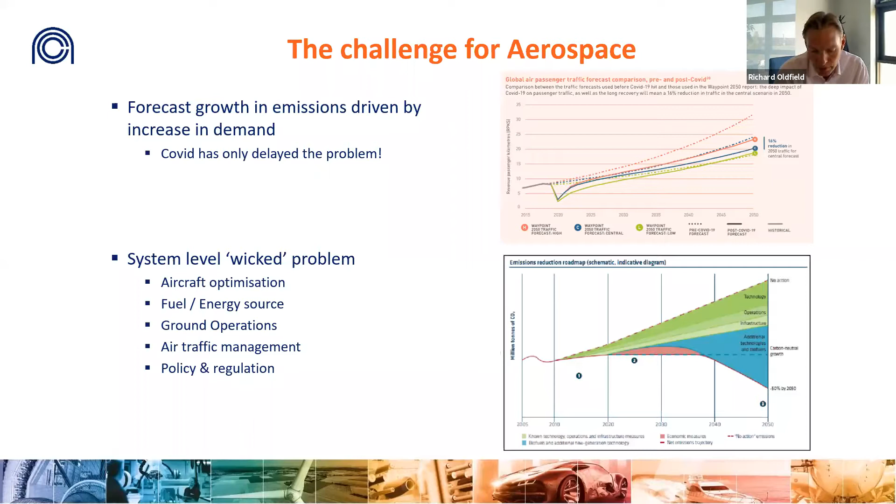The UK is already taking a leading role in this transformation. It's established the Jet Zero Council, supported by the Prime Minister and chaired by Emma Gilthorpe, Chief Operating Officer of Heathrow, which includes key industry and government representatives.

They're developing a net zero roadmap for aviation. You can see a draft copy of that on the right-hand side of this chart, and that will be published in the coming weeks and months with various initiatives underpinning it, supporting millions of pounds of research through UKRI, Innovate UK, and the Aerospace Technology Institute, to name but a few.

One of these programs launched recently is called FlyZero, a specific study looking at the aircraft of the future. But we're not the only country committed to this - you may have seen recent announcements in France and America indicating a growing commitment for change. The aim of today's showcase is to explore the work the University of Bristol is doing to support this effort. I'm delighted to hand over now to Professor Jonathan Cooper to lead the presentations.

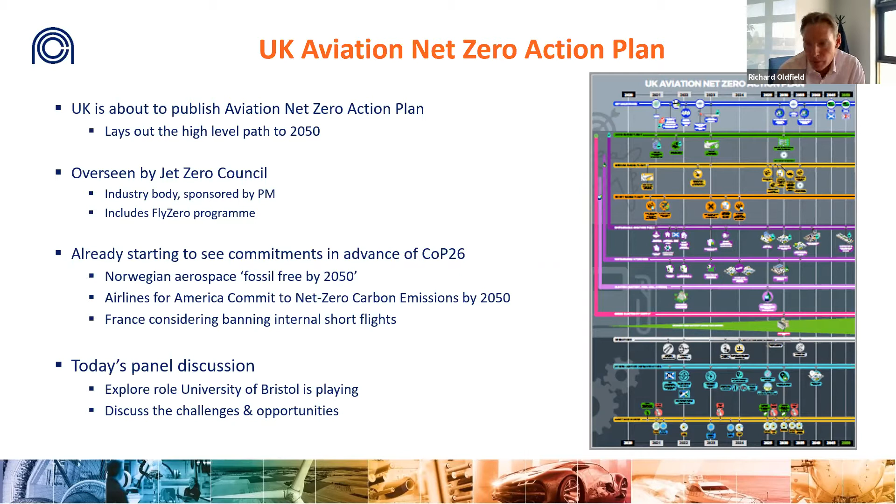Good afternoon, everybody. I've got a couple of slides to show you. The first one here is a bit wordy, but the key takeaway is there are many technical challenges that need to be faced for us to enable greener aviation and eventually zero emissions. And there is no silver bullet - there is no one single technology that's going to transform things overnight.

We can't simply just replace kerosene, and it's going to be almost impossible to retrofit current aircraft. So the likelihood is we're going to have a range of different solutions where we're going to be gaining 2%, 1%, 3% from different options, all of those together. One of the key things from that is we are going to have to produce much faster design and particularly certification requirements and capabilities.

I've put together a whole series of different technologies, some of which are just what can we do with current technology, so better engine efficiency. There's been some great developments there, but if we're not careful, we may do well with carbon but generate more NOx and contrails. Biofuels are mooted as quite a quick solution, but then you've got problems with the generation - are you actually taking away food resources to be able to generate fuels?

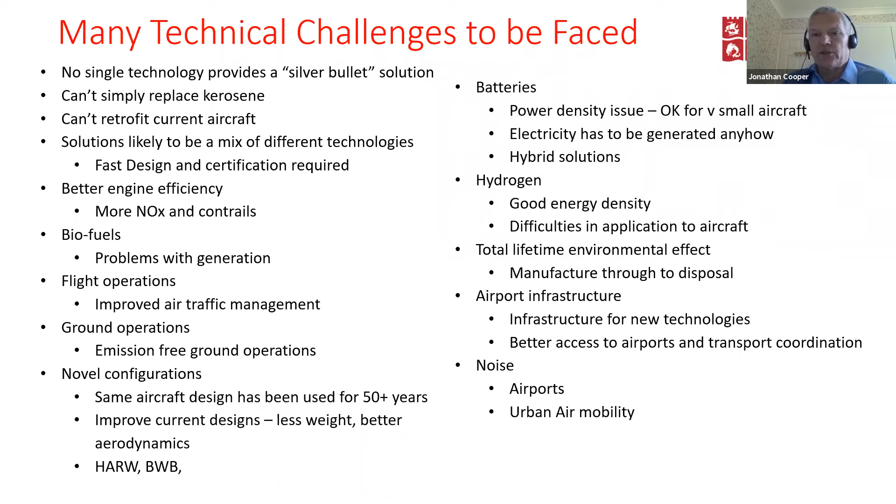We're trying to work together to find ways of producing more complete solutions. Data science is probably going to be the key thing that ties everything together, particularly when you're getting to really big, complicated design issues. And then things like talking to our colleagues in the Faculty of Science in atmospheric chemistry, for instance. There's a lot of other things going on in the university that we need to exploit.

As a final thing, it's not just aviation this applies to. You don't just want greener aviation, you want greener transport, greener infrastructure. So a lot of these technologies will map across, and there's good work going on and a lot more to do in the future at Bristol.

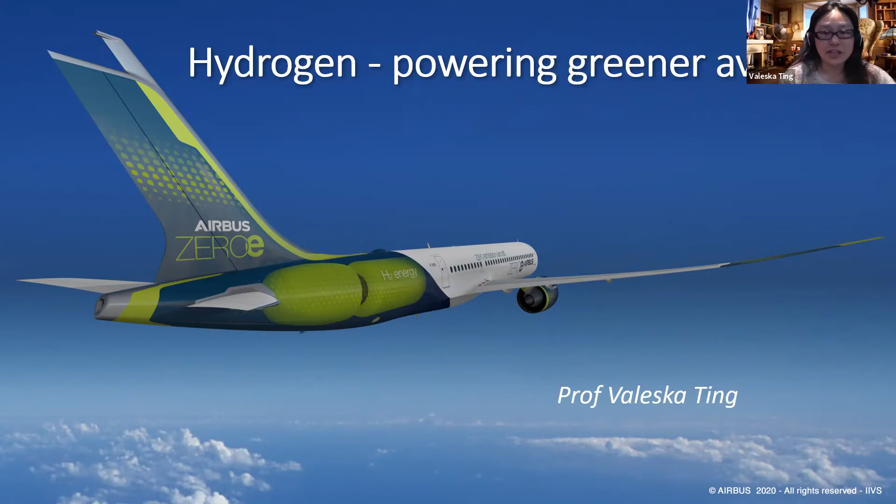I guess the first question is, why are we interested in hydrogen? And why do we, well, I personally think that hydrogen has a great future in terms of helping to get to net zero with aviation. And one of the benefits of hydrogen is it has a really high gravimetric energy density.

In fact, it is the highest gravimetric energy density fuel that we have. So that means, for example, kerosene has a fuel density in the region of about 40 megajoules per kilogram. Batteries are about 1/40th of that, so less than 1 megajoule per kilogram. And hydrogen has about 3 times that energy density per kilogram.

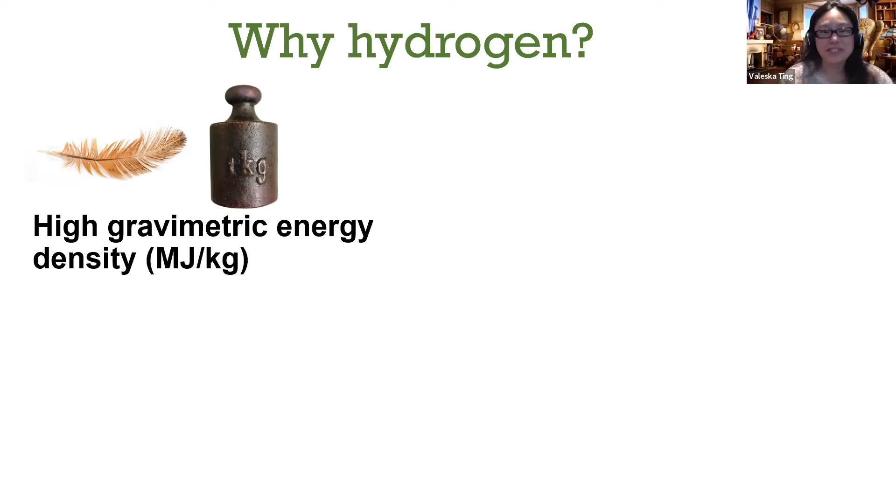So it's a very light fuel, and it packs a lot of punch for the number of kilograms that you have to have on board a vehicle. So that's one big bonus for hydrogen.

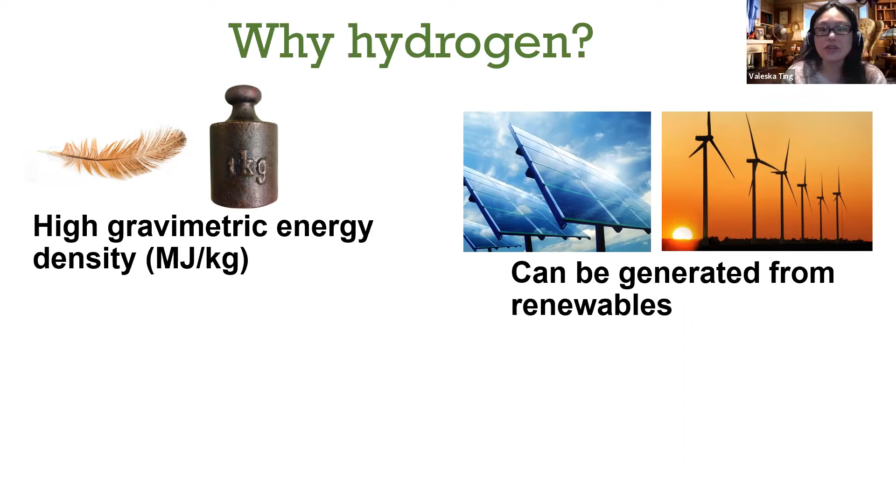The second one is that it can be generated from renewable sources, such as solar and wind power. And that means its production can be made more equitable. People can generate hydrogen using just renewable electricity and pure water, using electrolysis, for example.

And so it has a potential to be a complete green cycle in terms of a sustainable fuel. And then finally, if you use hydrogen in either a combustion engine or with a fuel cell, then the only byproduct is the regeneration of water. So it has this potential to be a zero carbon fuel, and also that you haven't got the problems with NOx or other particulate emissions that you would have with other fuels.

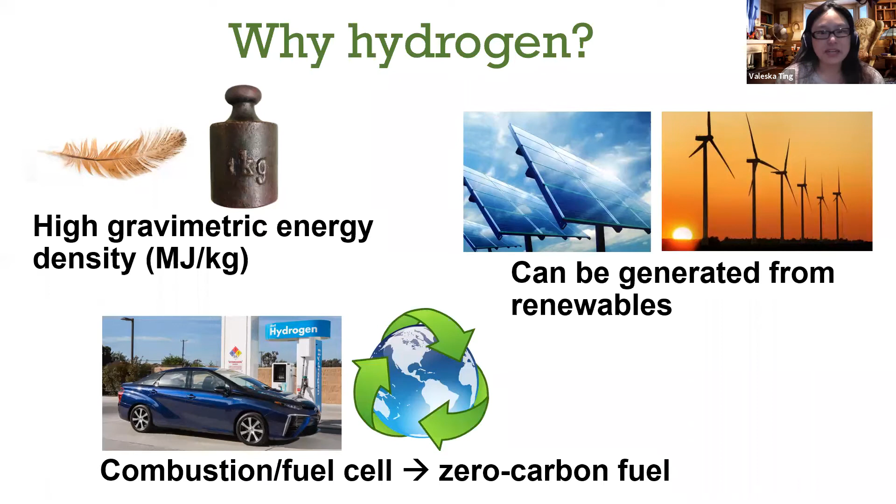So then we come to the question of what are the advantages of hydrogen for aviation? Now, as you remember, it's a very high gravimetric density fuel, so it's very lightweight. And this is important when you think of how much of a plane's weight comes from the amount of fuel that needs to be carried, especially on transatlantic flights, for example. So in terms of aviation, the saving in terms of weight is very important.

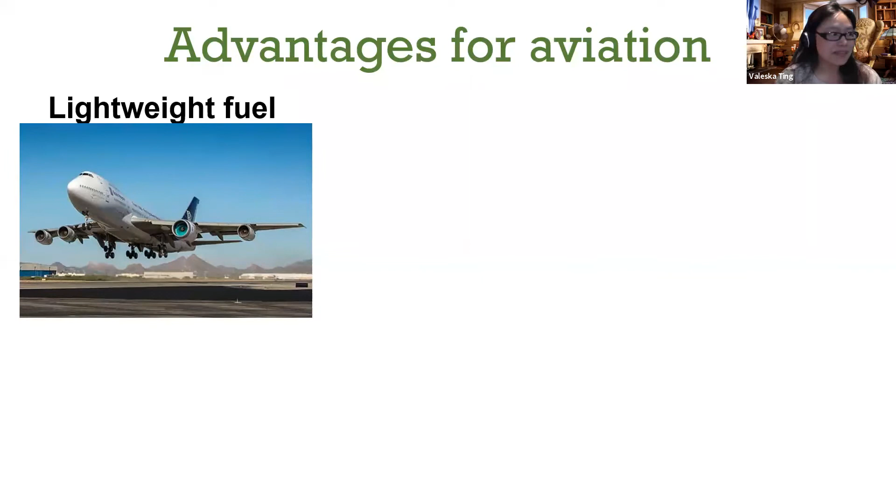A second aspect is that, as Jonathan and Richard alluded to, there are a plethora of different technologies available, battery electric or electric powered aircraft being one of them, but electric aircraft aren't suitable for long haul flights. So if you wanted to fly from the UK to Australia, for example, batteries don't have the energy density. The weight of the batteries alone would be prohibitive. And so for long haul flights, hydrogen is one of the most promising alternative fuel sources.

The third advantage is that, as was described in the introduction, we're going to need a really drastic transformation of aviation if we're going to meet these zero emissions targets. It's not just a matter of making our existing aircraft more efficient. We need to look at ways where we can cut out the carbon, the particulates, and the other emissions from aircraft.

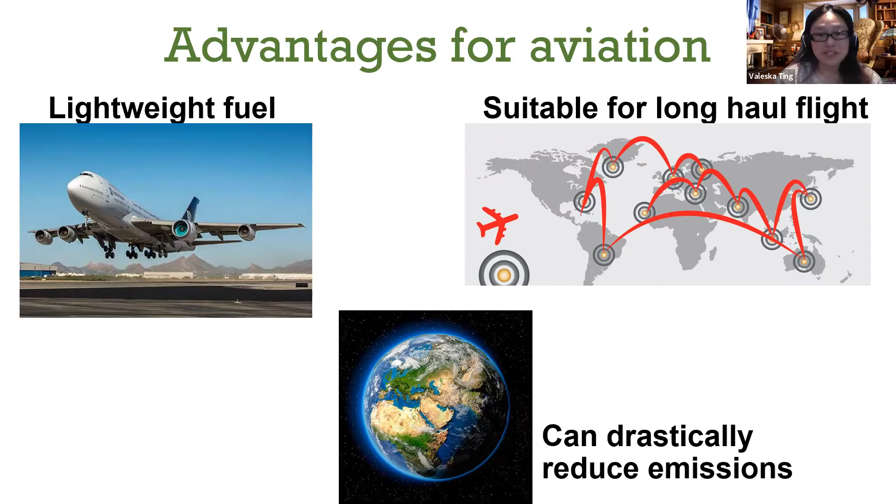And so, using drop-in fuel solutions like biofuels, for example, is just displacing the emissions and causing emissions at higher altitudes. We really need to go to something like a hydrogen plus fuel cell combination, so that we can eliminate the emissions from our aviation. This is one of the ways that we can drastically reduce emissions to try and get to those net zero targets. So what are we doing in Bristol to address these issues?

Well, in Bristol, we have some expertise in hydrogen storage. This is my area of interest, and it's looking at not only conventional storage of hydrogen in either high pressure tanks or as liquid hydrogen, but also looking at novel material solutions using things like nanoporous materials, which are also termed molecular sponges. These are materials that can suck in and store hydrogen at really high densities. So looking at inventive ways to be able to store the hydrogen more efficiently and safely on board an aircraft is one area that we can help.

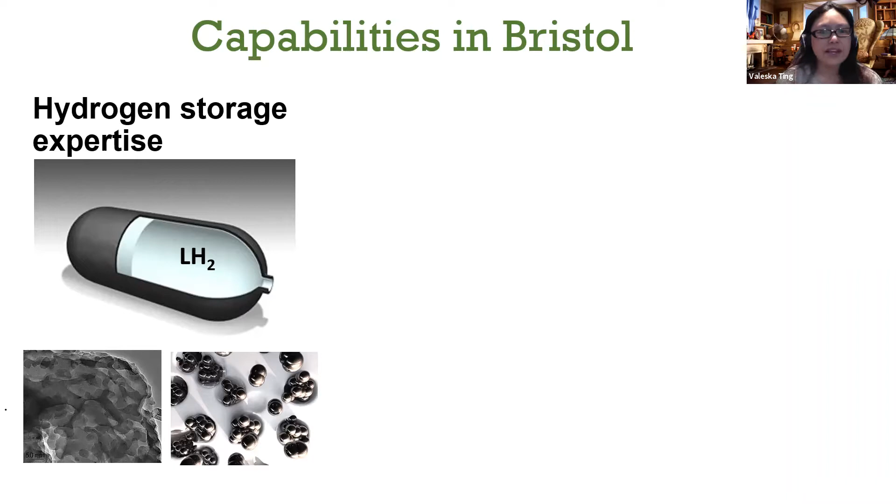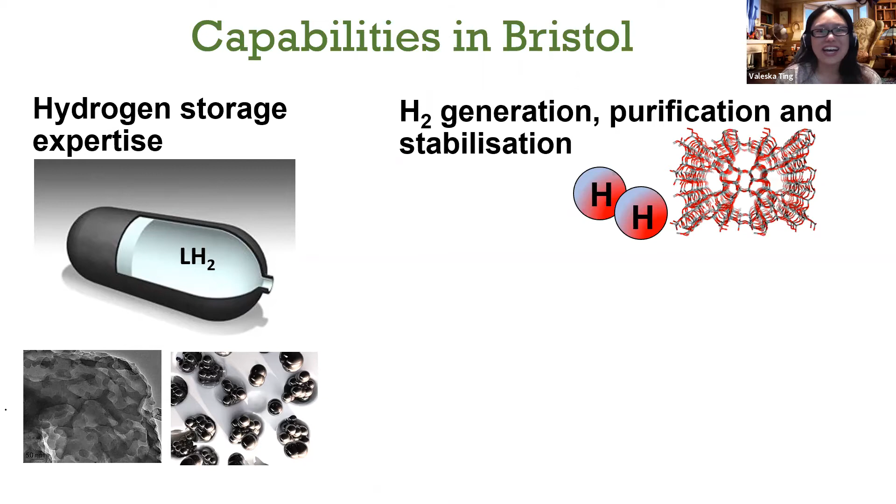Secondly, we also use some of these novel materials to help with the generation, the purification, and the stabilization of hydrogen. This is really important if you're considering storing, say, liquid hydrogen over a 48-hour cycle or over a long haul flight. You want to prevent boil off, and some of these materials are very good at helping to retard the loss of hydrogen through boil off. In addition, if you use fuel cells, then you need a very pure hydrogen source, and so we're looking at some good solutions for that.

And I'd be remiss if I didn't mention that Bristol has a world-leading Composites Institute, and we're also closely linked to the National Composites Centre. This is going to be essential if we're going to have to redesign the body of the aircraft to accommodate these different fuel solutions. So composite design and manufacture to make lightweight designs of aircraft, and additional flexibility when working with structural composites, being able to integrate the new fuel, the new power delivery within these aircraft. There are lots of opportunities in being able to embed functionality and new designs into the new generation of aircraft.

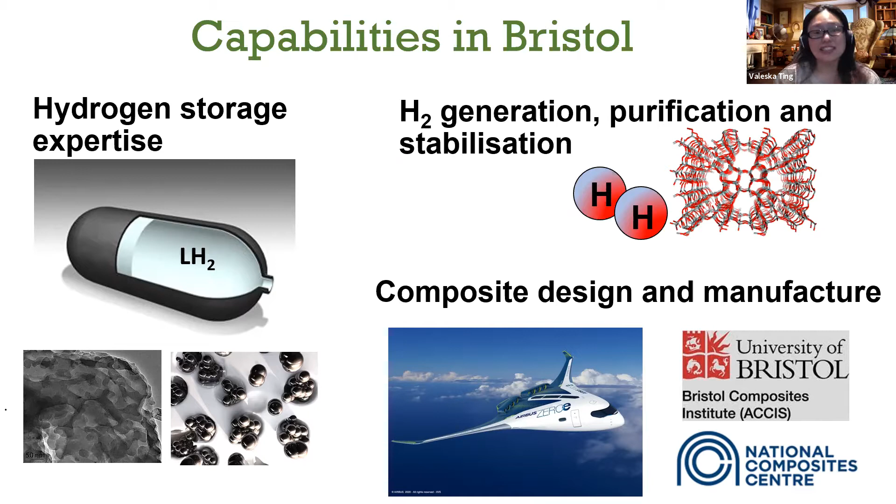have industry links. And we've also got colleagues in chemistry and physics who look at different aspects of hydrogen generation, hydrogen cogeneration, and all of this expertise and the broad base of knowledge means that we can make some really good contributions to making hydrogen a possibility for sustainable aviation. That's all I wanted to say for my brief overview.

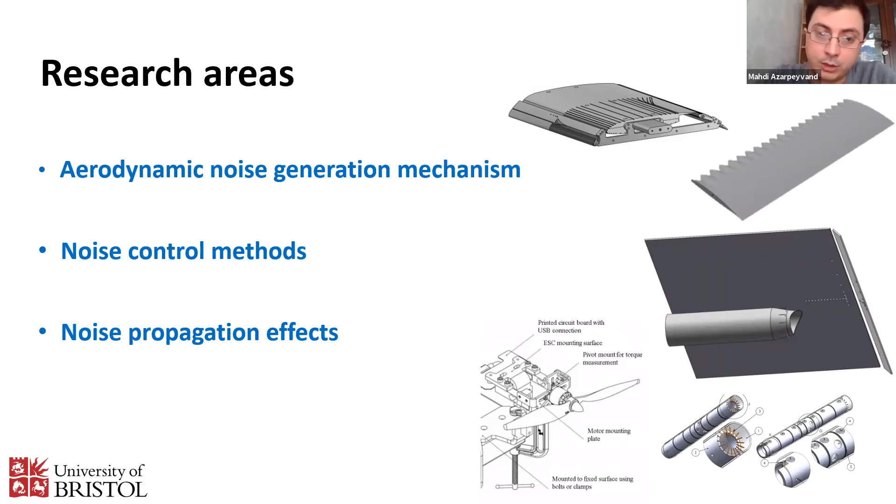Once we understand the noise generation mechanisms, we try to propagate the noise and understand the noise propagation over complex terrain, which is quite an important topic, especially in the area of urban air mobility or helicopter noise. Next slide, please.

So Bristol is home to some major infrastructures at the moment, quite unique in the UK and Europe. We have the UOB aeroacoustic wind tunnel. You can see it on the left side, which is now a national wind tunnel facility. This wind tunnel enables us to experimentally measure the noise from different aero components, whether it's a wing or propeller or the landing gear system, etc.

The wind tunnel is equipped with lots of microphones and a beamforming array and flow measurement devices like PIV, LDA, hot wire, which enables us to properly understand the noise generation mechanism. So this is a national wind tunnel facility, which shows its importance for the UK.

In the middle, you see our UOB high-speed jet facility. This is a jet noise facility for understanding noise from high-speed jets. This is, again, a major infrastructure, quite unique in the UK and involved in several industrial and EPSRC projects. We also have some other facilities, some of them quite new.

You can see there on your right the pressure neutral acoustic wind tunnel. This is designed for propeller research, again, realizing the shift in the research from jet to propeller. We have designed and built this new wind tunnel, which enables us to do proper research on propeller aerodynamics and noise.

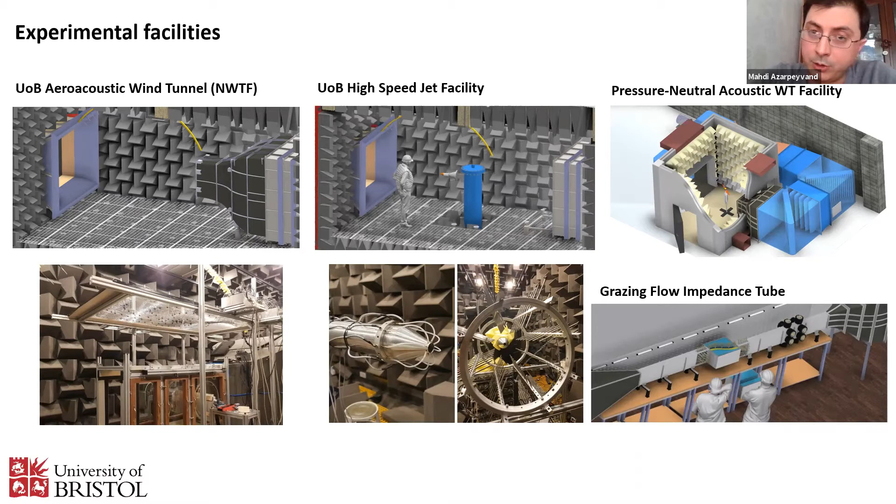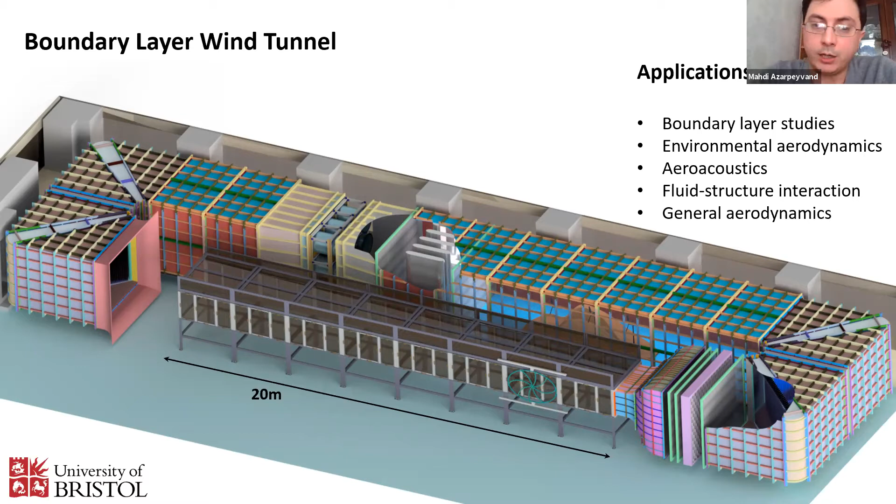Back to you, Jonathan. Thank you very much, Mahdi. I suppose the attention now goes to me.

So I'm going to give a short overview of some of the work on using aeroelasticity to help design more fuel efficient and environmentally friendly aircraft. We don't have an aeroelasticity research group, but this is spread across three research groups, so composites, fluids, and also dynamics and control, and involves, as I say, about 10 academic staff and about 15 researchers, mostly funded by the ATI, the EU, and also some from the EPSRC.

If the wings bend and twist, that affects the aerodynamics, but that then affects the loads on the wing, which then bend and twist again. So we have this continuing interaction. Initially, it was found that you have to design an aircraft carefully because you can have catastrophic structural failure, something called flutter. There's lots of fairly scary videos to see on the internet. But it also has a big effect on things like the response to gusts, the response of the aircraft on landing, and these resulting loads influence the aircraft design.

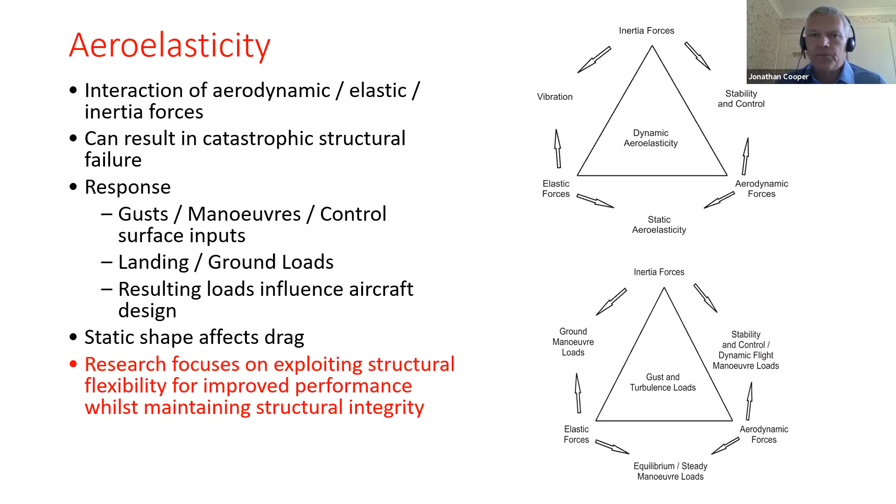So we move to the next slide. I was going to put an equation in, but I thought, no, I can't possibly do that. So this is what all first year students know as the Breguet range equation. And essentially it says that if you want to fly further, you have to have better aerodynamics, so less drag, more lift. And also if you have engines which burn less fuel, that also increases your range. And also if you have less weight, that increases range.

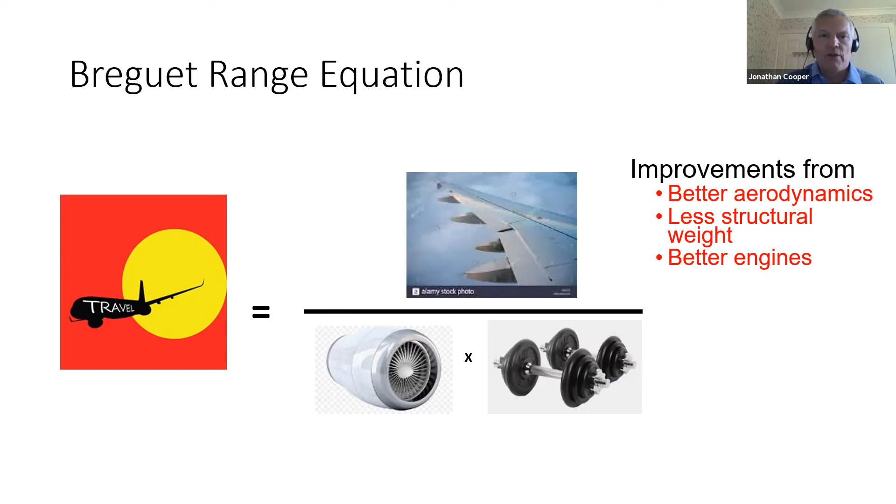And a lot of what I've been trying to do is to combine these three things together, and rather than just saying, let's make the structure as light as possible, or let's improve the aerodynamics as much as possible, can we get a trade-off and use those interactions? So we move to the next slide, which is perhaps a little busy. We've got the equation that we're all going to be tested on at the end of the talk, but how does the research help with that?

Quite a lot of work looking at novel configurations. I'll talk about what are called high aspect ratio wings, so longer wings, but also things like forward swept wings as well, which theoretically give you better performance, but we still don't know quite how they would appear in flight.

Key also things that we're looking at is reducing the weight. So we can do that by using composites, but also if we increase the speed at which things like flutter can occur at, that is good because it means we can reduce the weight. Or if we can reduce the effect of gusts.

So, you know, we fly and the captain says, put your seatbelt on. If we can reduce the effect of those gusts, not only will it be good for you as a passenger and you won't spill your coffee, but it means there's less loads on the plane.

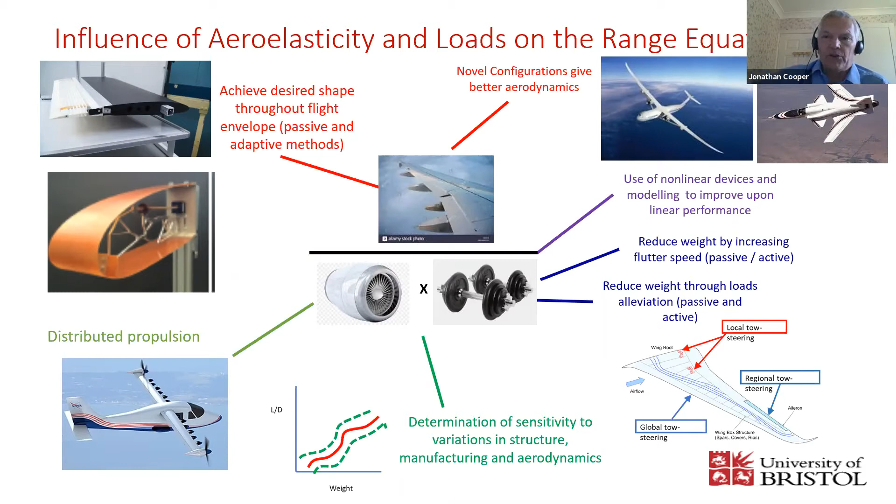And also distributed propulsion. We're not necessarily going to have 2 big engines or 4 big engines on aircraft. We're likely to have lots of very small electric or hydrogen powered propellers, and looking at that can have some quite dramatic effects on the design. So the next slide, please.

And the final 2 slides are talking about high aspect ratios, and you can show that by increasing the span, so making the wings longer, you reduce what's called the induced drag, and that gives you better performance. But there's a lot of things that could be a disadvantage. So you may need extra weight to carry the load. The wings are highly flexible, which could cause problems. The roll, and we want to be able to control the aircraft. So there's certain roll limits that we need to do.

Another key effect is that if your plane is too long, the wings are too long, you'll get charged more by the airports for the airport gate sizes. So that's why 737s and A320s are almost, you know, similar span, and that's because they're just below moving into the next gate category. And the design is much more complicated.

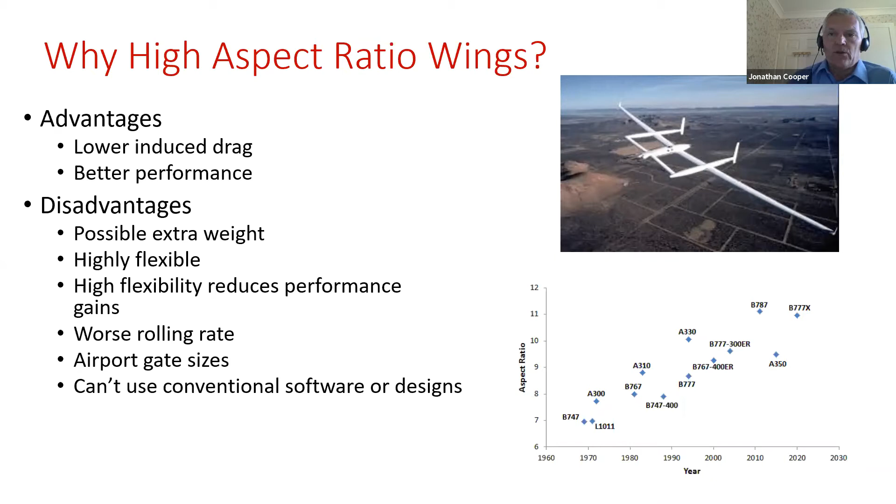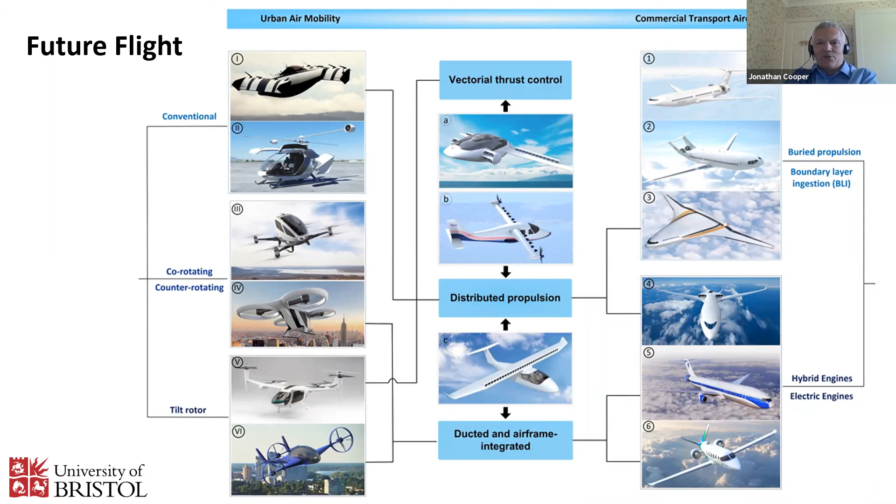So it's great to see that we're not just tweaking the tube and wing. Really interesting times. But how we get to the right solution, if there is one solution, I don't know. But that's why I'm an engineer. I did the maths degree originally, and then decided engineering was more exciting, shall I say? Sorry to any mathematicians who might be listening.

Well, I think on that last question, it really just summarizes both the opportunity, the interest, and the pace of development that's going to happen in this area over the next few years, and it will certainly be incredibly exciting to be part of that.